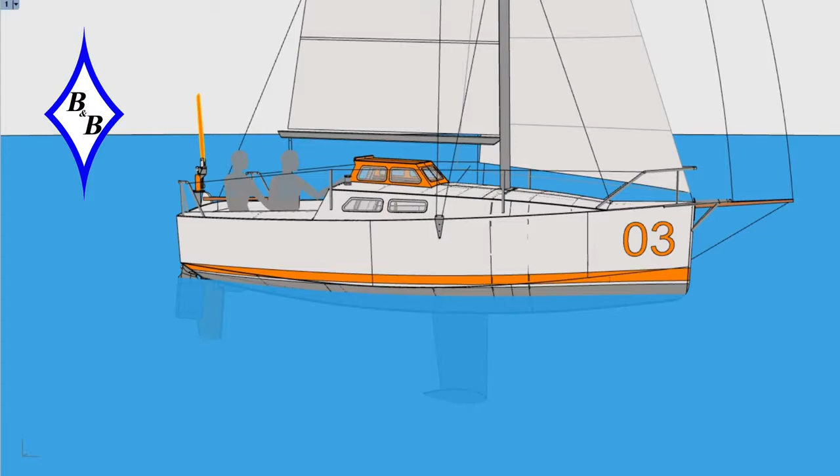Hey guys, this is Alan Stewart with B&B Yacht Designs, and today I am going to be doing a virtual tour of the new ClassGlobe 5.80 kit. I think we're all done with the files at this point, or at least to the point where we're ready to probably cut one of these out.

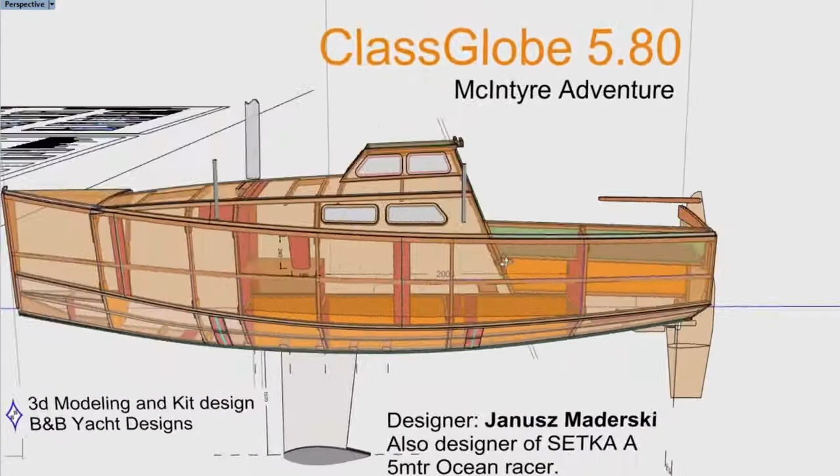So I just want to say thanks to Don McIntyre for letting us work on this project with him. It's been a lot of fun so far. When we first saw this design come out, we shot an email off to him and it kind of snowballed from there. Sailboats are really our passion, and we're fortunate to have been working on this project. I think it came out really nice, and we're looking forward to seeing some of these kits go together.

So I'll get straight into it. I've got a lot to cover, and I'm going to try to focus on the details of the kit specifically, and then the assembly, and we'll just see where it goes. I'll probably put some links to various sections of the video for people who want to skip through. But yeah, let's get into it.

Alright, first I think I'll talk about some of the unique modifications, or not modifications so much as additions that we've made in the process of 3D modeling the boat that I think are going to be instrumental in the success of the kit.

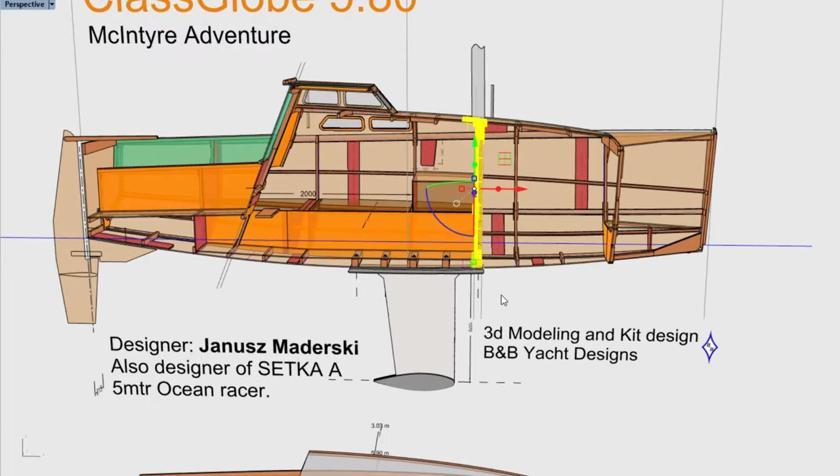Some early design decisions for the kit, one of which was to go with the watertight bulkhead. If you're familiar with the plans, or if you're not, this central bulkhead here that supports the mast is frame D1, and that is a solid bulkhead. In the kit it'll be a solid plywood bulkhead with a butt block down the middle, obviously because it's too big to fit in a sheet. Builders can choose to cut a hatch here, install a custom or an off-the-shelf hatch, or if you're not doing an around the world race, you can put a regular hatch in there.

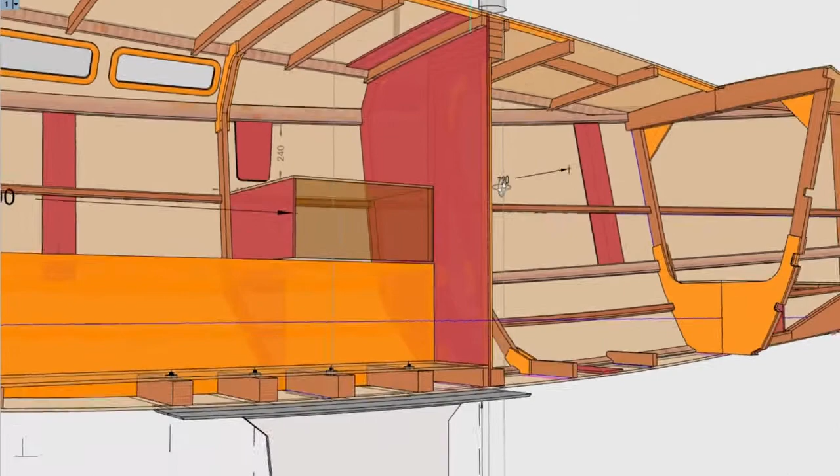Also, because we've put a solid ply bulkhead on the aft side of frame D1, the outer dimensions for this frame are to the aft side, and so the size of this frame is different to what's shown on the plans. It's slightly larger. So if you're building from plans and you'd like to build this frame as a solid bulkhead as shown here, then we'll give you a sheet that has the different dimensions for the aft side of D1.

The other bulkhead back here, which is frame A, is also going to be cut solid in the kit. The plans show a hatch here at the bottom of the bunk, but in the racing version, this would be a solid watertight bulkhead, and if it did have a hatch, it would be a sealable, off-the-shelf hatch, or a panel that was glued in place.

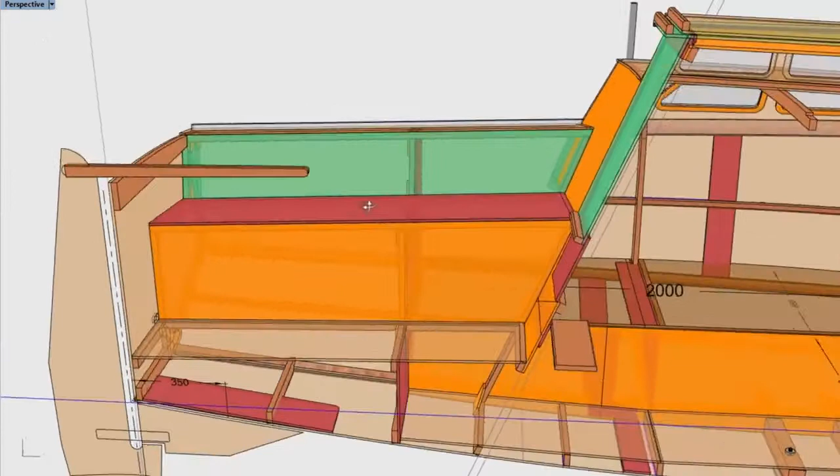In the cockpit, we have no hatch built in here. B&B has a nice watertight hatch design that I have not modeled, but we can provide plans for that separately if somebody wanted to build their own hatch. Of course, you could put an off-the-shelf hatch in the top of the seat top here.

Moving forward, in the kit, we've included the side of the bunk. That will come into play later when I show you the assembly of the kit. We've also included the bunk top panels and the galley box here. So as per Don's request, at least this is how he's going to do it on his boat, instead of a 2.2 meter bunk, we have a 2 meter bunk.

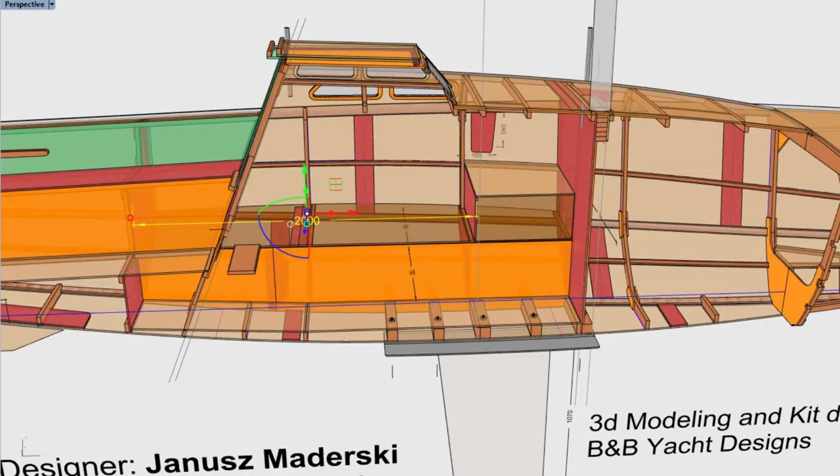And bear with me while I turn on some people. So here's a guy sleeping in a 2 meter bunk, and it's a generous bunk space. And that gives you the galley box here. You can have your athwartship sleeping arrangement with a lift out sole panel. You can do whatever you want to do with the galley here. This box is port and starboard in the kit.

We've included every piece of plywood with the exception of some of the companionway parts. So here we have the sliding hatch as designed by Janusz. Those parts are not in the kit, but there is enough plywood left over to fabricate those parts. For the around the world version, I suspect that you wouldn't have this particular hatch design, and so with the observation dome, you might choose to leave out this panel, which is the floor of the sort of turtle or garage for the sliding hatch.

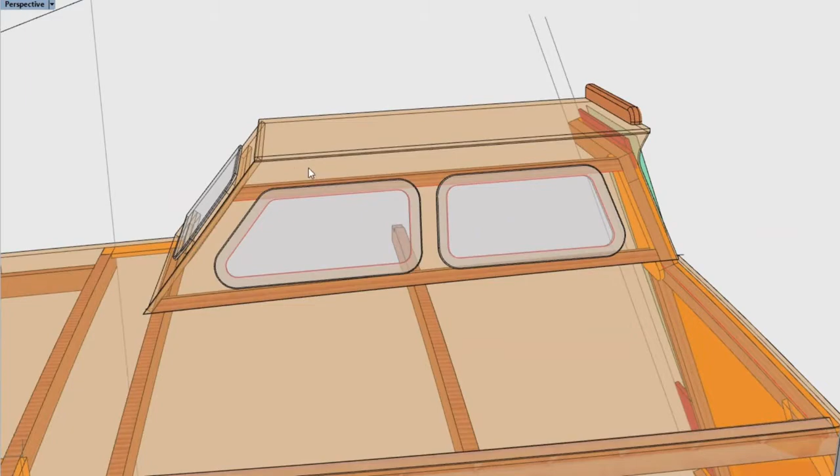And instead, you would just install a weather-tight hatch or whatever hatch you want in the slanted frame here. In the kit, the slanted frame is going to be manufactured as a solid bulkhead, so you can cut whatever size hatch you want into that slanted frame.

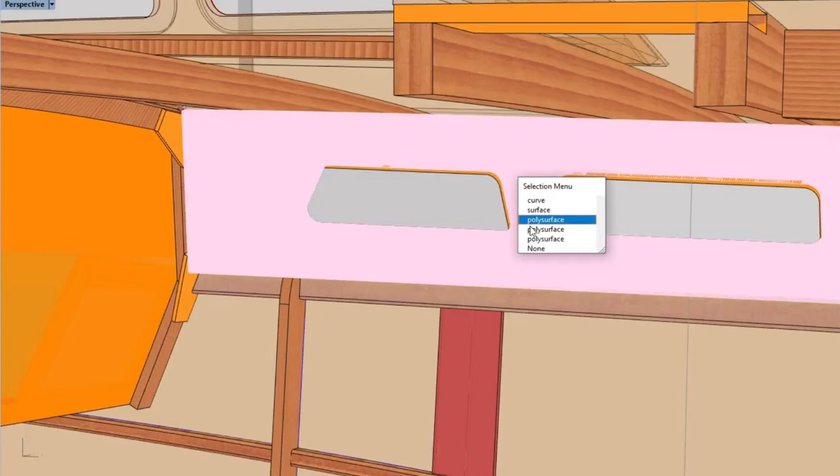We have done a set of port lights in the side of the shear strake to the size shown in the plans, as well as in the observation dome side and forward port. These would be polycarbonate, and in the kit we've got 9mm inside trim ring doublers to give you extra meat to fasten the polycarbonate to from the outside. So the polycarbonate is 20mm wider than the actual cutout for fasteners.

We haven't made any cutouts in the deck panel. The cabin top panel, there's two hatches shown, a vent hatch and an egress hatch in the forward part of the hull there. Those are solid. This panel is a solid piece in the kit, except it's split down just behind bulkhead D1 with a butt block.

Frame E, we've added a bulkhead up to the crash box height on frame E. I believe this bulkhead was shown in the plans, but we've also included this crash box top in the kit. You're seeing it in half section here, but you get the full piece, obviously.

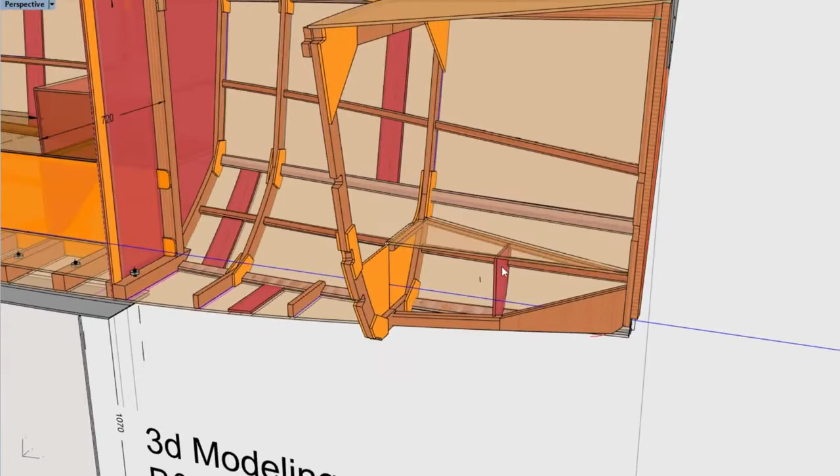And so this was the crash box, and we've also taken the stem knee, as drawn in the plans, and we've extended it. If I can grab it here, we've extended it back to frame E and notched the bottom beam of frame E so that the knee actually dados into that frame, which helps to locate the stem. The stem is in two pieces. There's an inner stem and then a stem cap, and those are CNC cut, and I'll get into the details of those in a little bit.

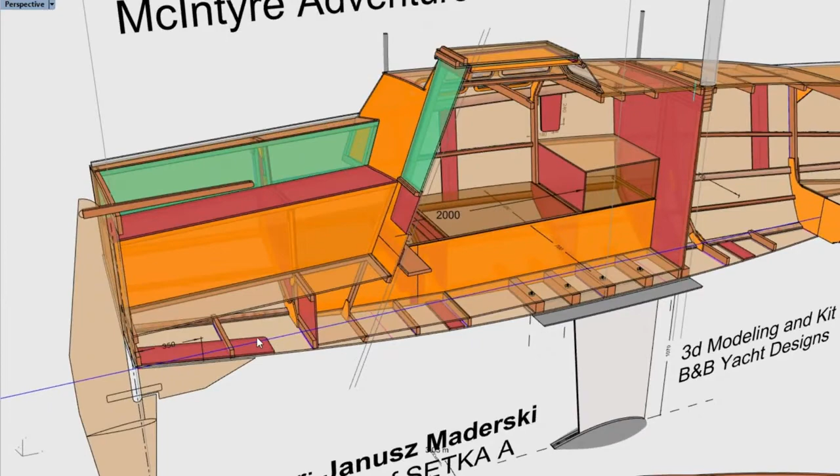So what else? We've designed in all the butt blocks for the side, chine, and bottom planking, as well as the doubler for the skeg and the chain plate reinforcement. We've really tried to think of everything that we could. So yeah, I'll go ahead and get into some of the details of the parts.

Alright, this is the part sheet as of today, May 10th. This is all of the parts that are CNC cut in the kit. So what you're seeing here, all the black lines are obviously 9mm plywood. All of these parts come out of 25 sheets of 9mm marine plywood. So there's the sheets, and the brown parts obviously are solid timber. Those are also CNC cut.

And the blue dashed lines here are pen lines. So these are drawn by a ballpoint pen using the CNC machine, and we use that for all the part numbering and also for drawing on reference lines, which I'll get to in a little bit.

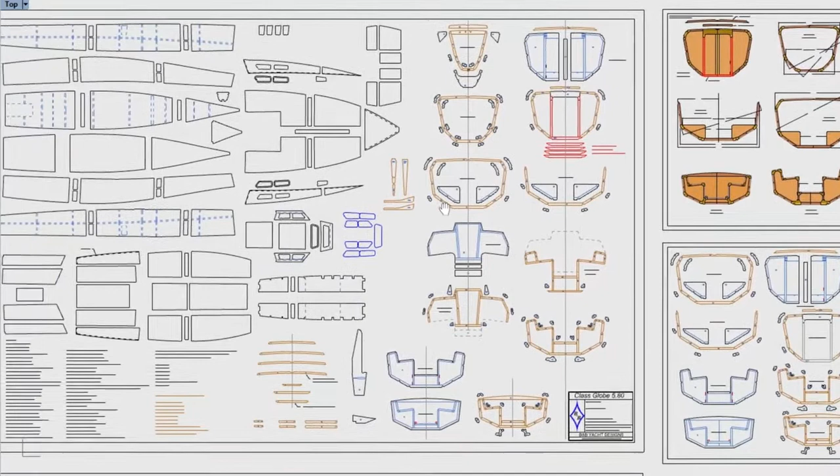On the frames, this kit is unique in that it has a lot of solid timber framing, because it's not a stitch and glue boat. It's frame and plank construction. So on the inside of all the frames, we have solid timber framing. So just in this example, here we have frame E. And so here are the timber parts for frame E. So this is to the plan. We have a top beam, side pieces, chine pieces, and then we have various gussets that connect over the joints.

Frame E also has a second beam on the aft side. Here's that frame that's on the back side of frame E. There's the dado for the stem knee. And you can see all these pieces are numbered with a frame letter and then a number, and usually they're going in a circular pattern. So I have E1, E2, E3, E4.

And because all these parts look very similar, we've also added a reference identifier, and that's this little circle here. It's about a 4mm diameter circle. The circle is on any part, especially the small parts, where it's not clear which way they might go. So for example, this gusset E9, the dot indicates the topmost corner or the innermost corner.

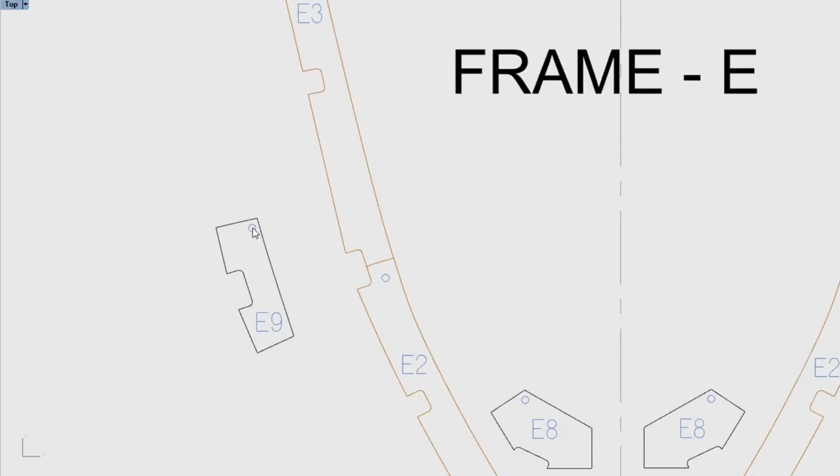So in this case, if you're just looking at this part, you would see the dot, and basically if you pinched the part at the dot with your fingers and let the part fall by gravity, that's kind of the orientation that the part would take in the frame. So that will hopefully help to position these parts properly, because this part is almost but not quite a mirror image fore and aft. And that brings up another point.

In the kit, many of the parts are port and starboard. For example, we have 2 E9s. And it would be really easy to just take this part and copy it and cut out 2 of them. The problem with that is that when you put this part in the correct spot over here, if you have the pen line facing the user, then the part's upside down.

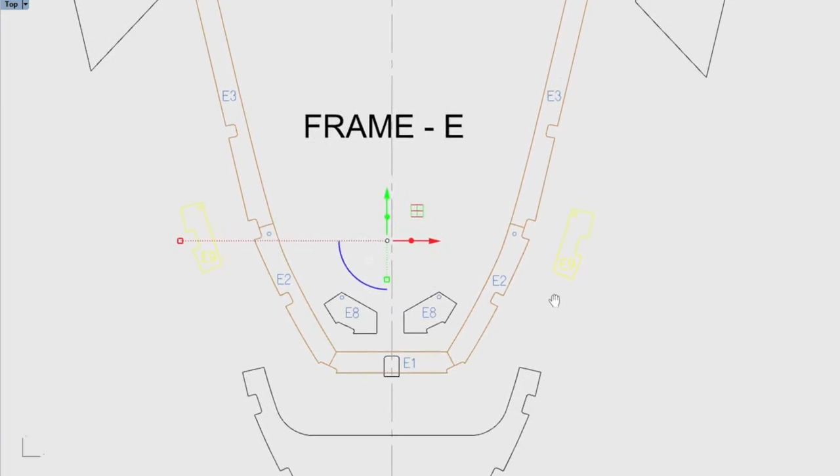So we take the extra step to actually include a port and a starboard proper part. So you will get a port and a starboard part, and so when you assemble the frame, all of the indicator marks will be facing the user in pretty much every case.

In order to keep from losing all these gussets, we've combined the gussets for each frame into clusters. So here is a gusset cluster for frame A, and here's the other one. So these parts here contain 3 gussets connected with small plywood bridges, and this one has 4 gussets with bridges. And this is just helpful when CNC cutting, that we don't have these tiny pieces flying all over the place. So these would just be broken apart, and then a quick sand to clean up these bridges.

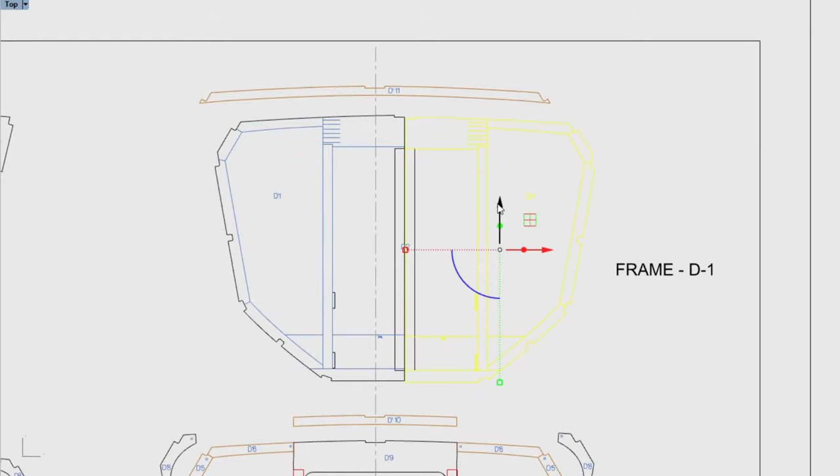Here is frame D1. This is the mast support frame, and this is a good example of one of the frames that is a solid plywood frame, and you can see all the blue lines are reference lines. So when you assemble this frame, you'll put the butt block across the joint on the forward side of the frame, and you've got these lines referencing where all the cleats go, all the framing. So here's all the framing for frame D1, and you can see it's similar. It's ringed with these timber pieces that are all numbered with the dots and the lettering.

We have frame D and also frame D1, and so with the part numbering, frame D is numbered with a D, and frame D1 is numbered with a D prime. That's the way we decided to do it.

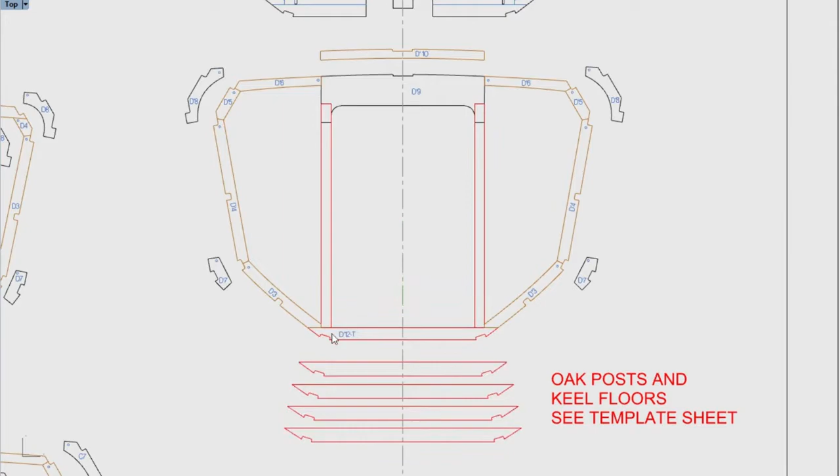So these red parts, these parts are the keel floors and the posts for the mast, and these are too thick to be CNC cut. So what we've decided to do is include templates for these keel floors here, and these are just dimensional stock. So this is something that could be supplied in a full timber kit, or these oak pieces could be sourced locally by the builder and cut. And I'll show you really quickly the template for that.

So here's a template for the keel floors. The keel floors have obviously a forward and aft edge. So here we have the 5 keel floor timbers. The black line is the forward edge of the true cutout for that chine log, and the red line is the aft edge. So what we've done for the templates is we've taken the absolute outer perimeter of those 2 lines and provided that as a template.

So you could cut all these parts out on a bandsaw, and when you fit them into the jig, you could do your final beveling and not worry about cutting away too much material. So this is a 1-to-1 template of the half size of the keel floors.

The other frames follow the same logic. Here we have frame C. We've added in the kit these partial bulkheads for frame C where they go underneath the bunk tops.

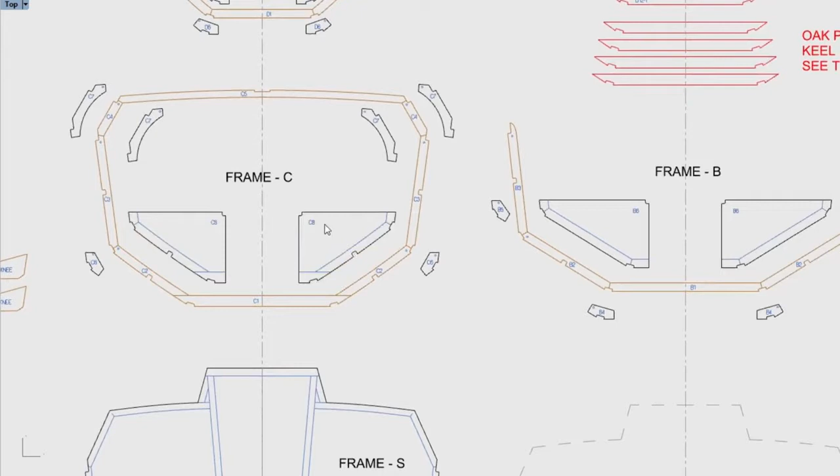Frame S, we named S for slant. It's the slanted frame, which is the companionway frame. And here you can see the bulkhead part of the frame, the plywood part, is in 2 pieces because it's too large, so there's a butt block here at the bottom. And there's a forward and aft side. Frame S is one of the more complicated frames. Here we have the forward side and all the pieces associated with the forward side and the aft side.

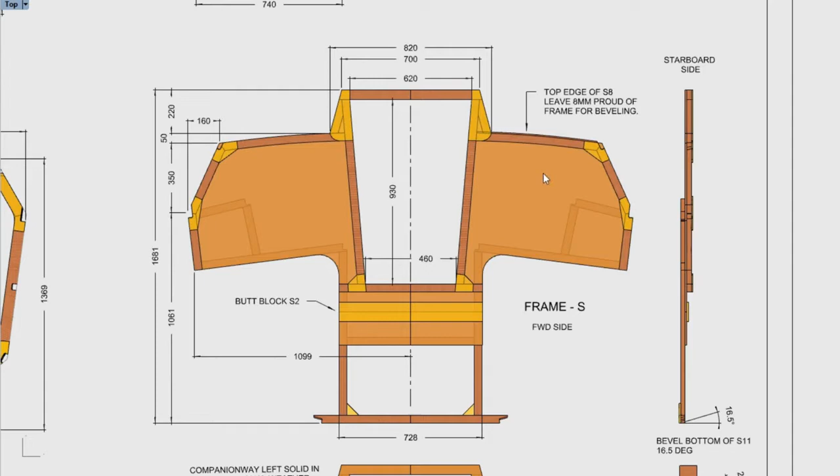And for assembly of the frames, we have a sheet showing how the parts go onto the plywood. Frame S is also unique in that it's at such an angle to the other parts. So a few of the details there. The top beam here, which is S8, is left proud of the plywood bulkhead, and then it's beveled to receive the foredeck. We've also given the bevel for the bottom of frame S, and that's where it intersects with the bottom planking.

And also on the aft side of frame S, here we have the framing that supports the side deck, the seat top, and the cockpit sole, and those can also be beveled prior to assembly of the frame itself.

The dimensions of all these match the plans in almost every case. Giannis really did a very nice job with the plans, and we found all the dimensions to be very accurate. And so you'll find these dimensions match with the plans, which they should do because it's the same boat.

And here's another example of a frame. You know, we try to think of what information will you need to assemble this frame. And helpful information is like diagonals here for checking the squareness of the frame and the overall dimensions, of course.

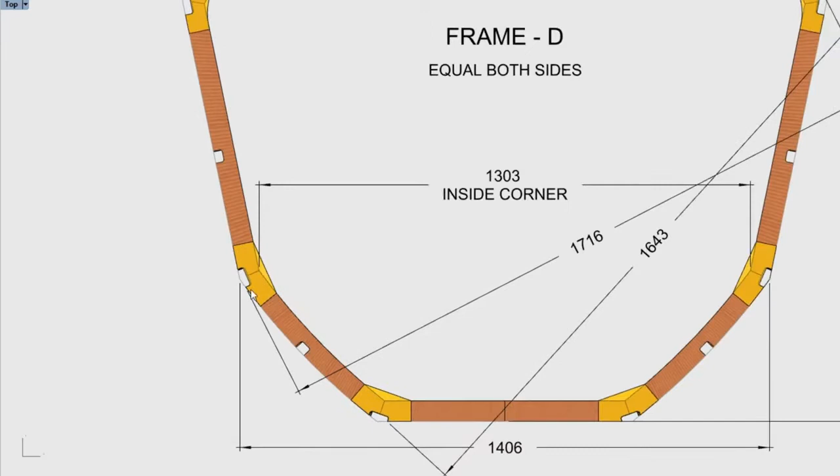But because the parts are all pre-notched to the minimum notch for the various stringers, we can't measure straight to the corner very easily. So we've made an effort to try to mark where we're actually measuring to. So you can hook your tape measure, for example, on this corner and send it across to this space and check your diagonal in that way.

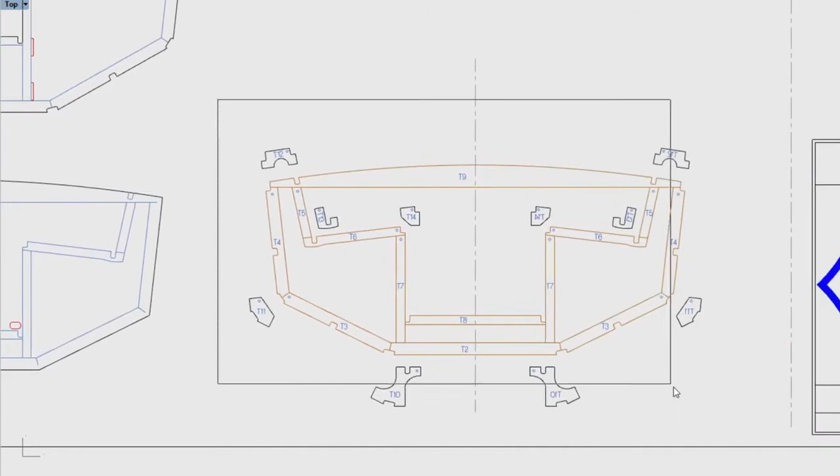The transom frame and also frame A are both solid plywood frames. Here they are, here and here, and they both have a fair amount of framing. The transom frame could be assembled using the transom as the template. So here's the pen lines all drawn on the transom. So you could lay all your transom framing onto the transom and glue down all your gussets, and you could install that in the jig without the actual transom panel.

And that's nice because you can then let your battens and your side stringers run past the transom, trim them off later, and then glue the transom panel on. There aren't any dimensions given for the transom because they're all drawn. All the parts locations are drawn on the transom. There is another sheet in the kit plans that shows all these parts in a larger scale because it's difficult to read all the numbers here for the bulkheads.

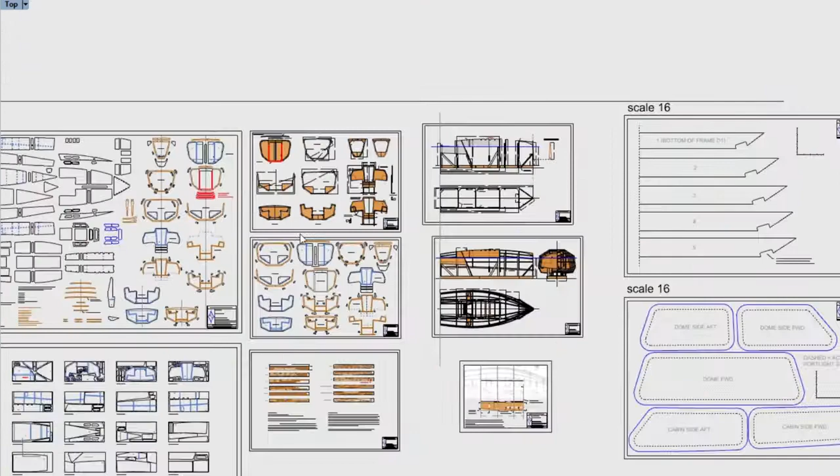In addition to all of the frames, we have CNC cut parts for the stem cap, and also the knee gusset. The knee is in 2 layers, so it's laminated together. And we've also provided a sheet that gives that knee shape as well as the inner stem in full size, so that if you are building from plans and you can get your hands on this sheet, you could cut these parts out and fit them in, because that will help you to locate frame E and also the stem. And that also leads me over to this jig drawing.

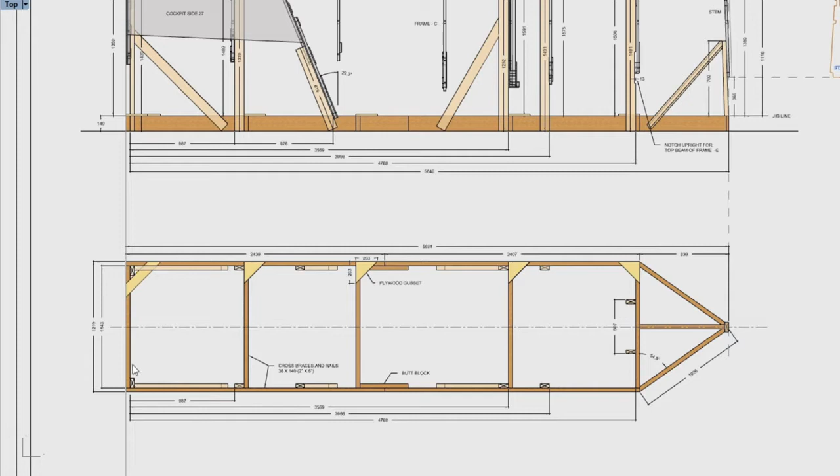So we've designed a strong back with dimensions for building the jig on. In the US, this is 2x6 dimensional lumber, which is 38 millimeters by 140 millimeters. The actual size of the jig itself does not really matter. It could be any material really. We've tried to dimension it so that we're referencing the inside of the framing. So you could build this out of any material. And we have these upright posts here, which in the US we would use 2x4s, but whatever is available anywhere. And it really doesn't matter.

But this sheet shows all the frames in their location on the jig, with the height of the frame above the jig line, and also the location of the frame relative to the transom, which is as they were dimensioned in the plans.

The stem, we've given a height for the top of the CNC cut stem and the knee, and you can see here where the stem knee is dadoed into the bottom of frame E. And so we've got an offset for the stem, which gives you the stem rake, and the stem is fastened onto the forward side of a little upright here, and the height of the stem is provided there.

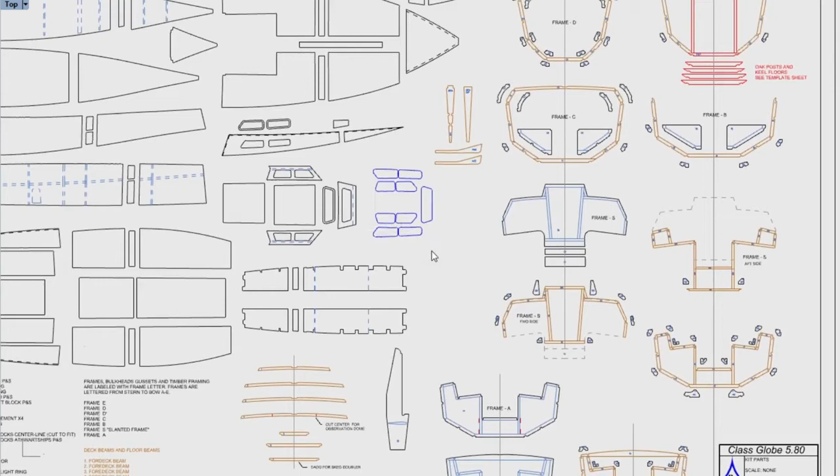We also have CNC cut deck beams. There are 4 deck beams, 3 additional bottom floors, and also some fore and aft beams included, as well as these plywood templates for the skeg and rudder, which we were able to fit in the sheets as well. These are the polycarbonate shapes for the port lights, and those are also provided at 1:1 scale if you want to cut out your own port lights.

And if you want to do something different for the ports, then you should just contact your kit manufacturer and say, please cut me out a sheer strake panel that does not have any cutouts in it. And I'm sure they'd be happy to do that, and you could put in your own ports if you wanted to do larger or smaller or whatever. I think that just about covers the kit parts.

So here are the solid timber parts nested in the boards. And so we CNC cut these parts directly into boards. These boards are 8 inches by 96 inches, or 2440 by 203. And all these parts are finished thickness of 22 millimeters.

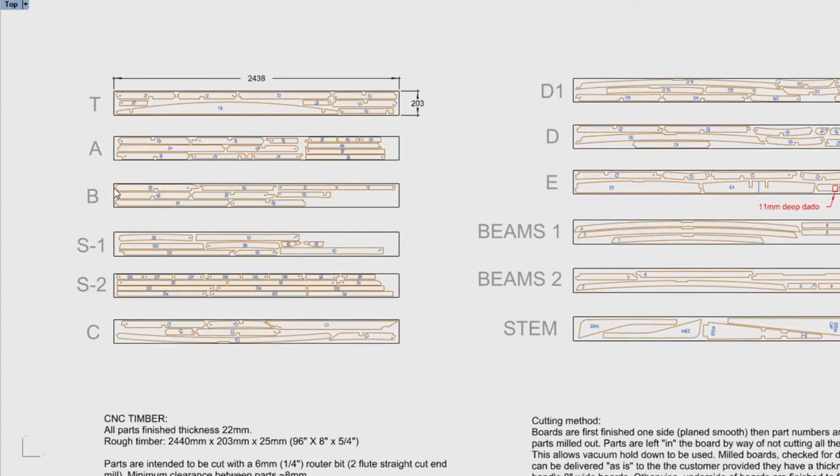So the way we typically do that is we surface the top of the board, we draw our location information with a pen on the parts, and then we mill out these shapes in the board, but we don't cut all the way through. So we leave a skin on the bottom of the board, which you can then plane off through the thickness planer, and all these parts just fall onto the floor. It's brilliant. Every time I do it, I enjoy it.

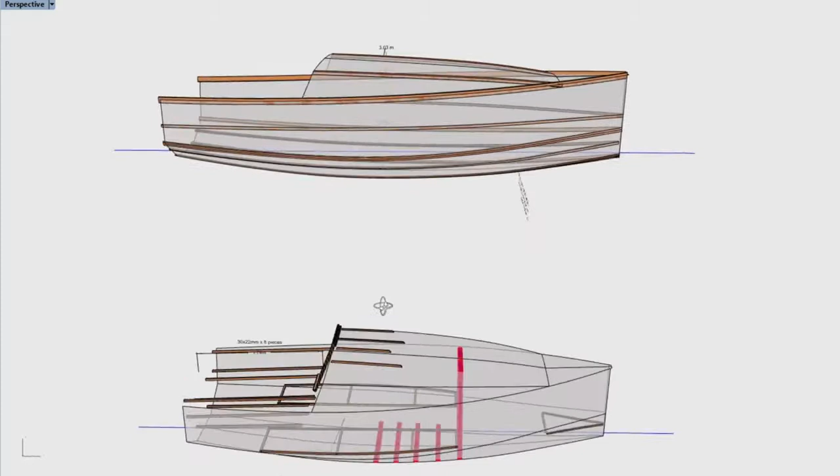So there you can see all the solid timber parts, with the exception of the mast supports, posts, and the keel floors, which brings me over to this model here. These 2 models are all the parts that are not included in the CNC cut kit, but could be included in a full timber kit depending on your kit supplier.

So this top one shows all of the hull stringer material, as well as the length of each of these, which will be helpful also for someone building from plans. These are the exact lengths of the parts, so you'd want to add a little bit for sizing these. So those are the chine battens, or chine logs, or whatever you want to call these particular pieces, the chine pieces. And these are the panel stiffeners, the stringers for the chine planking and the side planking.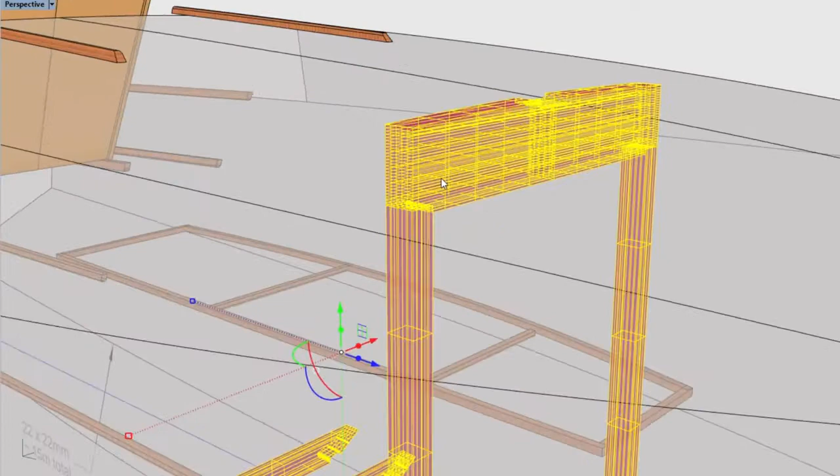And here we have this other model. These purple parts are not included in the kit sheet that I just showed you. Neither are the keel floors. So these are either sourced by the builder, and these parts here. These are the athwartship parts that are clearly identified in the plans. You got all this grain running across here, and you got your mast sitting right here. So you want these particular pieces of timber to be nice and strong. These could be supplied by the kit manufacturer, or they could be just cut by the builder.

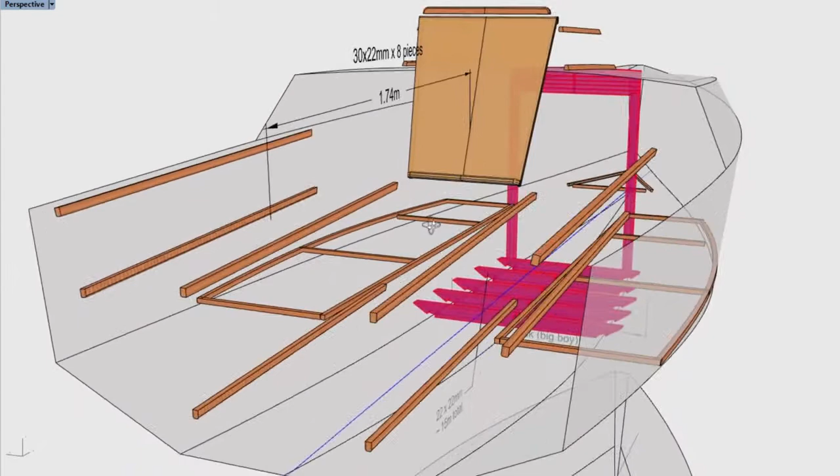These other pieces that you see, these are framing pieces for the bunk top. These are not included in the kit. Again, these pieces could be included in the kit, but they are not CNC cut. So this would be an additional timber package that would accompany the kit, that you would rip all these pieces out. So these are all the cockpit cleats for supporting the sole, the seat tops, the backrest coamings, and the side decks. And those are 8 pieces, and there's the size of those if you're following along at home.

There's also a few pieces of solid timber in the observation dome, which I didn't dimension out, as well as a frame around the top of the crash box. While I'm here in the model, this is a displacement model of the 580, and so you can screenshot this if you're interested in the displacement. We have the displacement at the design waterline, and also at -10 to -80 millimeters of displacement, and you can see it's about 75 kilograms per centimeter of immersion.

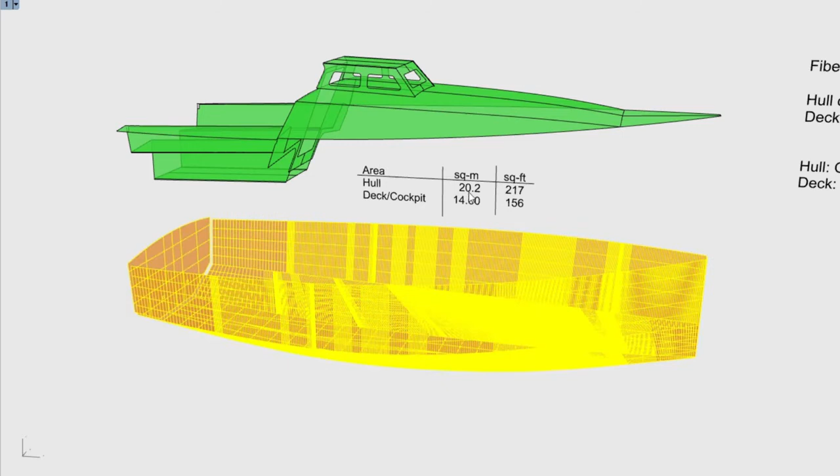Since we just got some clarification on the glassing schedule, I decided to also show some surface areas. So this is the total surface area of all the hull panels, 20.2 square meters, and all of the deck panels, which includes all the cockpit panels, is 14.6 square meters. And in our case, at least for kits in our area in the US, we will probably be cutting all of the plywood components from 9mm Okoume marine plywood, because we don't have access to 10mm without special ordering it.

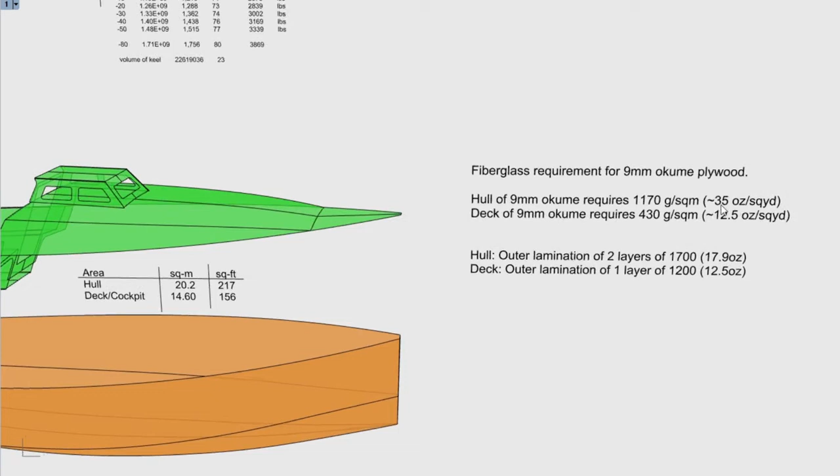So in that case, the outer lamination for the 9mm Okoume hull was given as 1,170 grams per square meter, and for the deck 430 grams per square meter. And so I converted that into ounces per square yard for our US glass purchasing. And so for the hull, the outer lamination would be 2 layers of 1700, which is 17.9 ounce, and for the deck it'd be a single layer of 1200, which is 12.5 ounce, which is very close. And then of course the joints are also taped with fiberglass, and this is just the outer lamination to bring the hull planking up to the required strength.

This is another little addendum sheet that we did, and this is showing the dimensions of the bunk side. So in the kit, this is right here, and I've got my dots turned off. Let me turn the dots back on here. Bear with me 1 second.

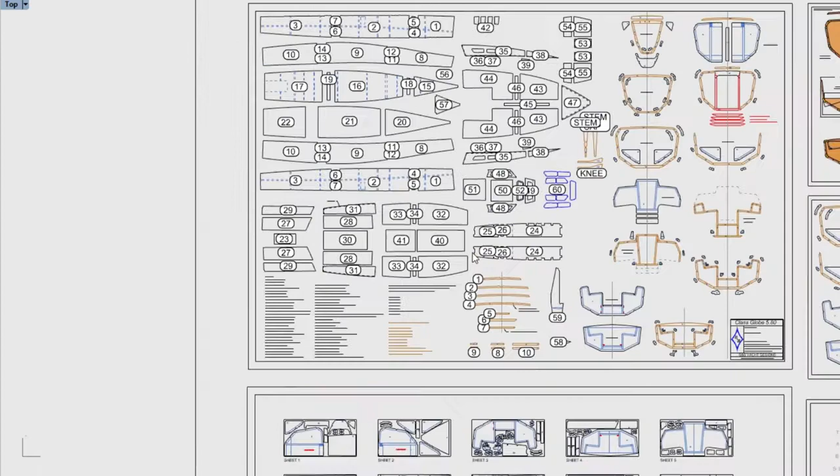They just get big when I zoom out. These are parts 24, 25, and 26 is the butt block, and you can see those are listed as bunk sides fore and aft. And so if you're building from plans, this part is nice to have, and I'll show you why in a second. But this is that part dimensioned out. If you're building from plans, you could cut this part out, and it will help you with the jig assembly,

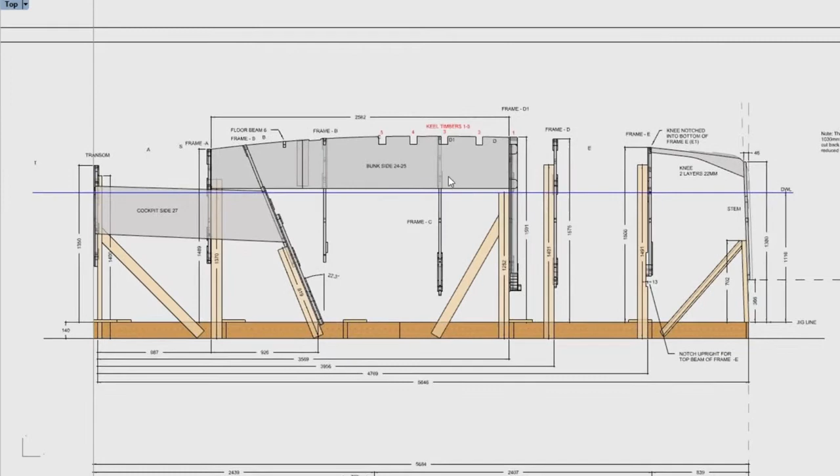because what we actually do is we install this part into frame A and frame D1 as part of the jig assembly. So, all right, here's the frames floating in space, and I'll just give you a quick view of each one, starting at the transom. There's the transom with all its framing. This is frame A, and again, this gives you an idea of all the notching that's been pre-done in these kit parts. So you've got notching already done for all of the support for inside the cockpit.

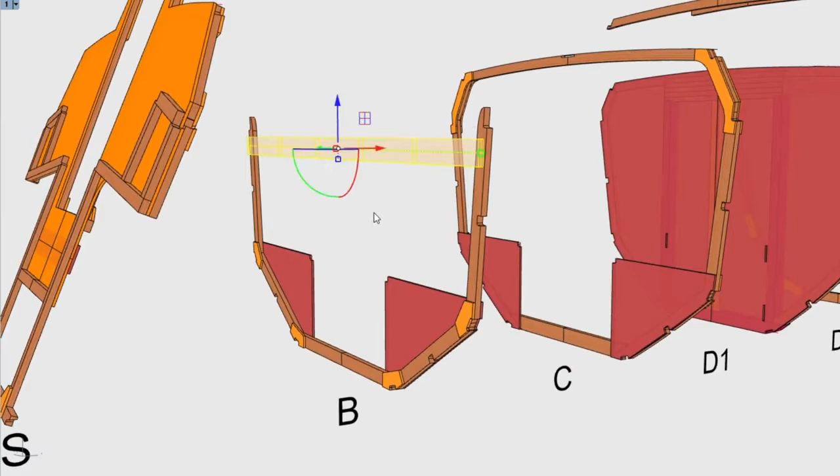Here is the slanted frame, fore and aft. There you can see that butt block on the slanted frame. This red line indicates the amount that this top beam is left proud. It's actually not shown proud there in that particular view, but the part is left extra tall. Frame B is the only frame that doesn't have any across the top support, so this is a temporary 1x4 or something like that, just to help keep that frame from moving around.

Frame C is the next frame in the bunk, in the forward part of the bunk. Frame C is where the galley starts, the galley box. And so there's the fore and aft part of C. Frame C does not have any gussets on the forward side of the lower chine, because there is a floor timber running across the forward side of frame C. Also, I don't want to get anybody confused. So this bottom part of frame C we actually changed because of the way this cutout is.

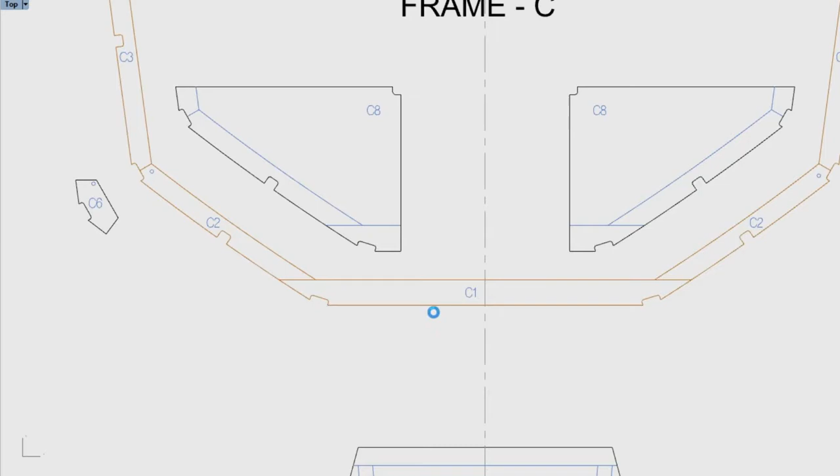Let me jump back over to the kit parts. Frame C. There you can see we actually sent the bottom beam all the way out as opposed to sending C2 down. So basically the notch is on this piece as opposed to on that piece. And the reason for that is just for the integrity of that particular piece. Sorry, it took me a while to get back. It just looked a little bit fragile there, so just to clarify that.

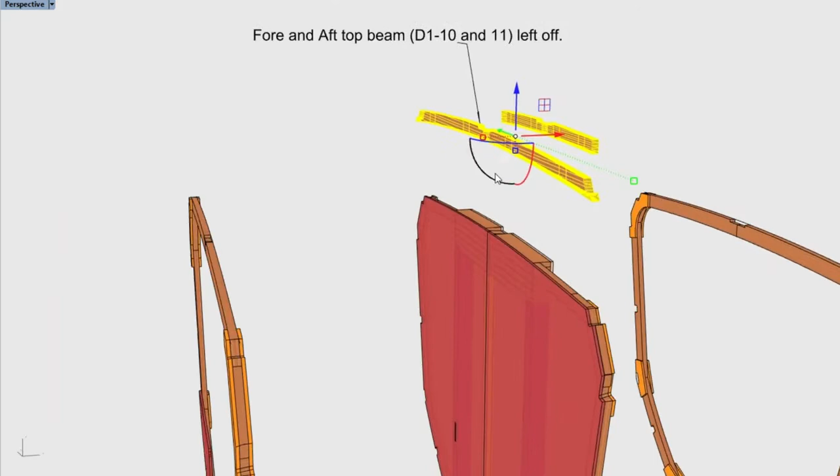So there's frame D1. You can see the purple pieces again. Those would be not CNC cut, in addition to these other pieces behind this plywood cap over the mast support. The aft side of frame D1, of course, is a smooth bulkhead, watertight bulkhead, and we'll get to these notches in a second. When the frame D1 is assembled, we leave off the forward and aft top beams. So this beam here is glued across the aft top edge of frame D1, and this one across the forward edge of the mast support.

But we want to leave this one off for the jig assembly so that it doesn't interfere with our support for supporting the bulkhead. And this one we want to leave off because a lot of it's going to get cut away when we bevel the top of D1 for the foredeck. Here we have frame D. Frame D is a pretty simple one. It's symmetrical fore and aft. And of course frame E with that crash box bulkhead on the aft face and the extra beam across the back side that supports the hardware for the baby stay.

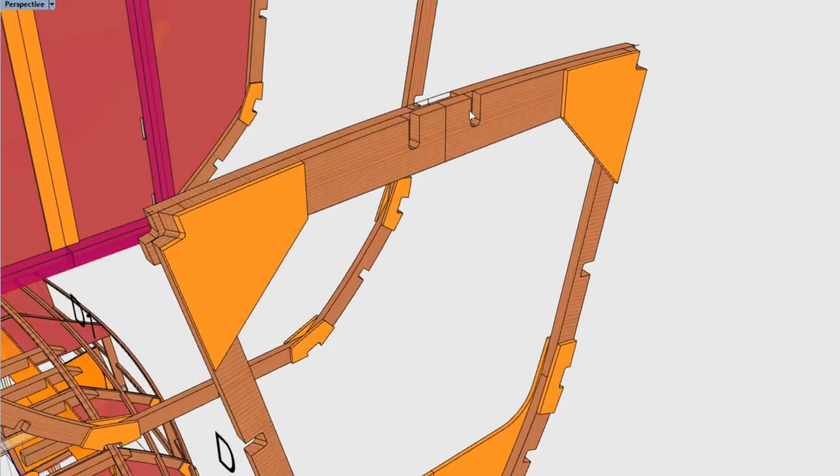And here is another detail. The forward part of the beam on frame E is notched out to receive the king plank beams that support the foredeck and take the compression loads from the forestay. And also these top beams are notched, you'll notice, for a plywood butt block which joins the two halves of the deck. So those are all the frames.

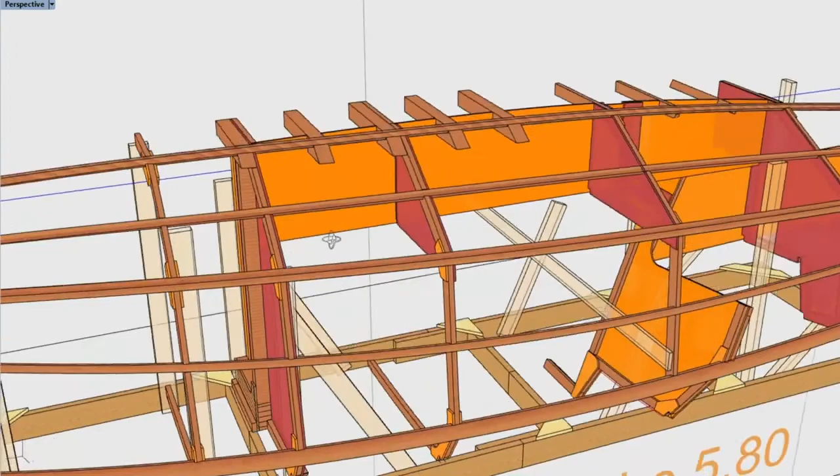In addition to those assembled, you will also assemble the bunk side piece, which is the two pieces fore and aft of the bunk side, as well as one of the cleats, the cleat that runs fore and aft, this one right here, and that would just stiffen up that panel. So this would be a little bit of a sub-assembly, and this leads us into the jig.

Here we have the jig. I'll actually jump over to this one instead. So here we have the jig. So here's the strongback. These obviously are our temporary support pieces. And here you can kind of see what we've come up with. This is kind of the reveal.

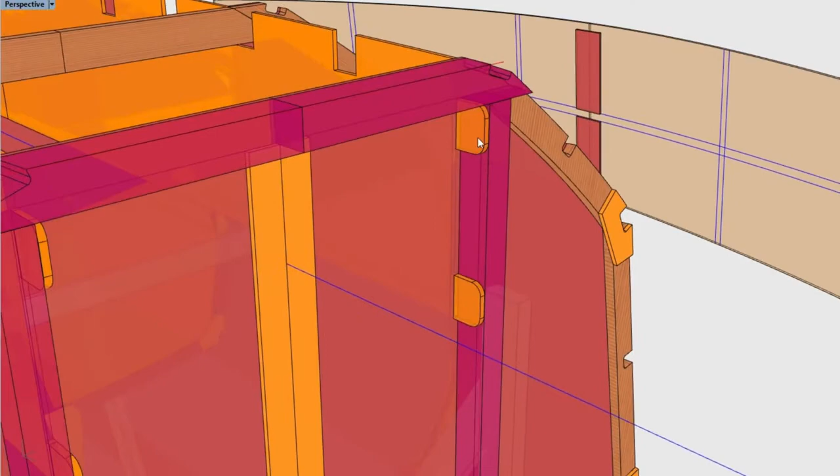These two frames, B and C, actually hang by the bunk top sides, and so they don't require any other support than that. You can see the bunk sides are pre-notched for all the keel floor timbers, which locates those fore and aft. And the bunk sides have these tabs, and now you can see the purpose of those notches in D1. The tabs slide through those notches, and then the bunk side can be secured to the mast support

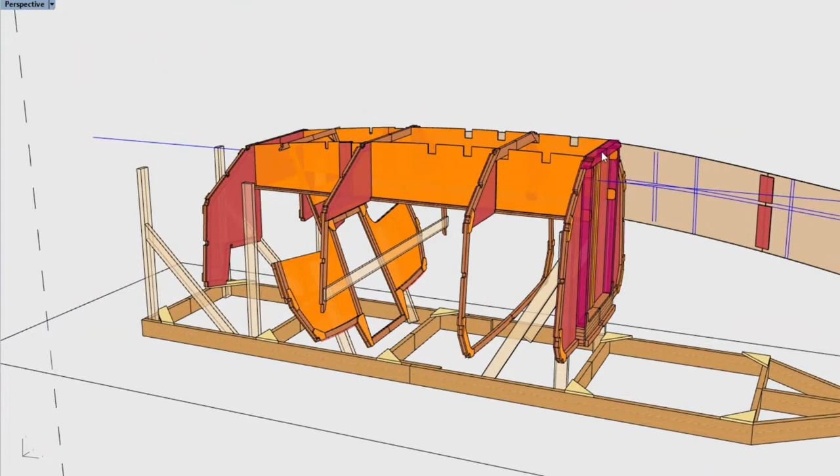post. And in the back, we have similar tabs going through frame A, and they can be fastened to the side of that vertical framing. The slanted frame is also notched out, and so the slanted frame drops right into the bunk sides. And of course, these two frames drop down into those notches as well, so that locates those frames. So really the only thing you're having to do is establish the vertical height of frame D1 and frame A, and all these other pieces should fall into place.

There's a dimension provided for the location of the slant frame at the bottom, and it's clear of the floor by a little bit. The side panel also comes into play here, because the side panel in the kit, although it's made up of 3 pieces with butt blocks, these blue lines you can see are going to be CNC drawn on the inside of the side panel, and they all have the frame locations indicated on them.

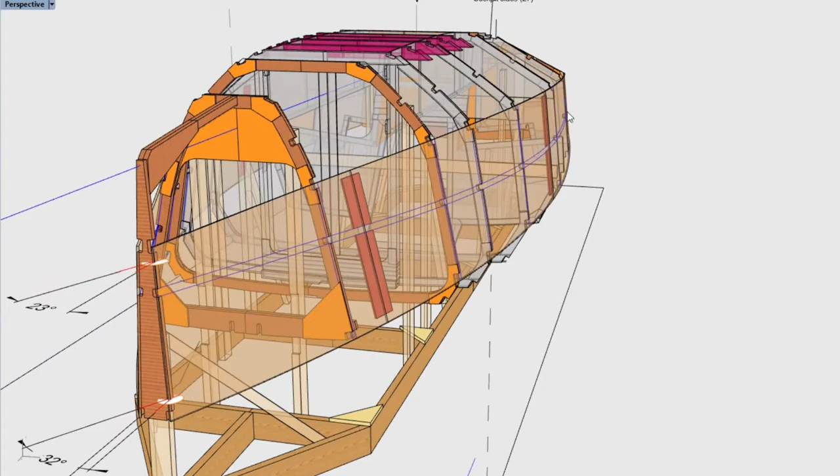So if I go up to the next step here, you can see I've got the side panels bent around the jig, and this is helpful as a double check, but also for alignment of all these frames, both vertically and fore and aft, because once you assemble this side plank, you can't really get these frames out of alignment as long as they are lined up on these lines. And the side panel stringer runs through the middle of the side panel; these notches on the frames locate each frame vertically, and the side lines locate it fore and aft.

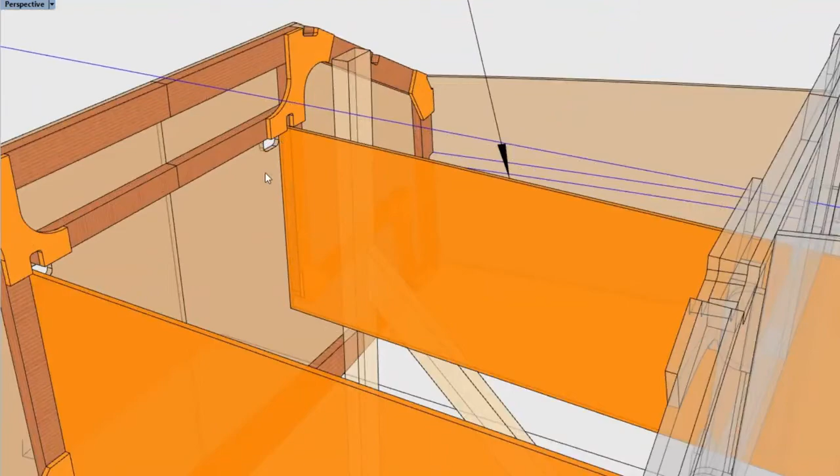So in this render here, the assembly from the previous step is grayed out, and in order to establish the location of the transom, there are a number of options, but the easiest one is to actually use the cockpit sides from the kit. The cockpit sides will butt right up to the aft face of frame S, and right up to the inside face of the transom, and that locates the transom exactly.

The other way to do it, of course, is with the side panel. You can temporarily hold the side panel up to the framing, and the side panel is cut exactly to size. We left it 1 millimeter long in case you're using 10 millimeter plywood for the kit, but I think everyone's going to be using 9 millimeter. So that establishes the fore and aft and vertical location of the transom.

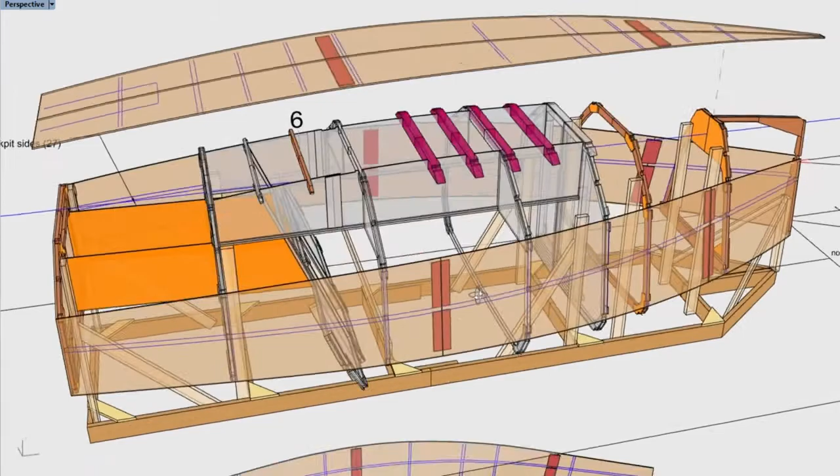It also establishes the location of frame D as well as frame E, which you can also get from the plans, but it's always good to do a double check, especially with any pre-cut parts in the kit. This is something that we stress with all of our kits, because all the parts are basically perfectly cut to size. You want to take advantage of any part that you can do a dry fit on, to use that part as an alignment tool for the parts that will go on further down the process.

Another detail here on frame E: due to the extra beam across the aft edge, we've notched out the vertical support for frame E so that the frame is plumb in the jig. On the stem, here are the stem bevels, slightly different top and bottom for the side panel itself. So the stem could be pre-beveled to these angles.

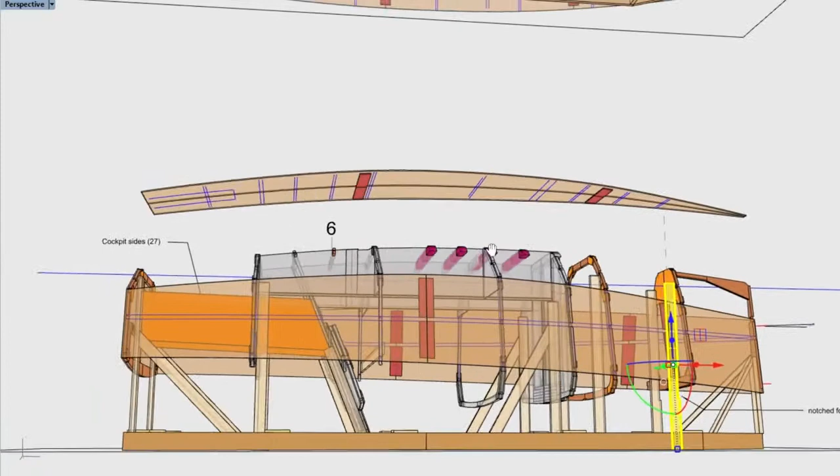Similar to the side panel, the first layer of bottom planking has all the pen lines drawn on it for the location of both the frames as well as any additional floor timbers. So for example, here is a floor timber that is installed across the bunk tops, so it would need to be installed prior to the bottom being glued down if you were permanently installing the bunk sides.

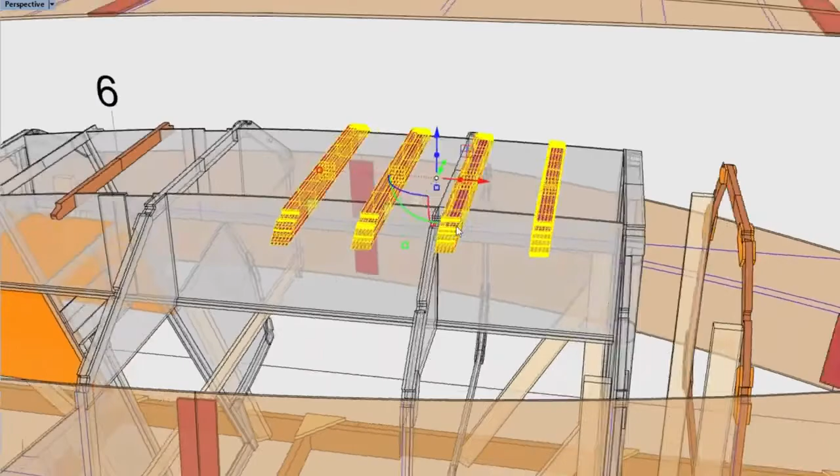That brings me to another note. These bunk sides do not have to be installed permanently in this way. You could, in fact, assemble the bunk sides dry with these butt blocks and use them just like we've used them here, but only as an alignment tool, because you can actually remove the bunk sides after the boat is flipped upright. And you would do that if, for example, you wanted to cut out the floor timbers and install the floor timbers later on in the process, rather than in situ here as shown.

before the bottom planking was glued on. And it may turn out that that's an easier way to install these keel floor timbers, but I think it's possible that they could be installed into the jig pre-notched like we've shown here. But again, if that for some reason ends up not working out for people, then you would simply remove the bunk side panel after the boat was planked, install your keel timbers, and then reinstall the bunk side panels.

So the bottom plank can also be used as an alignment tool, of course, to locate the frames and just more fore and aft position references, basically. I think that just about covers everything in this drawing.

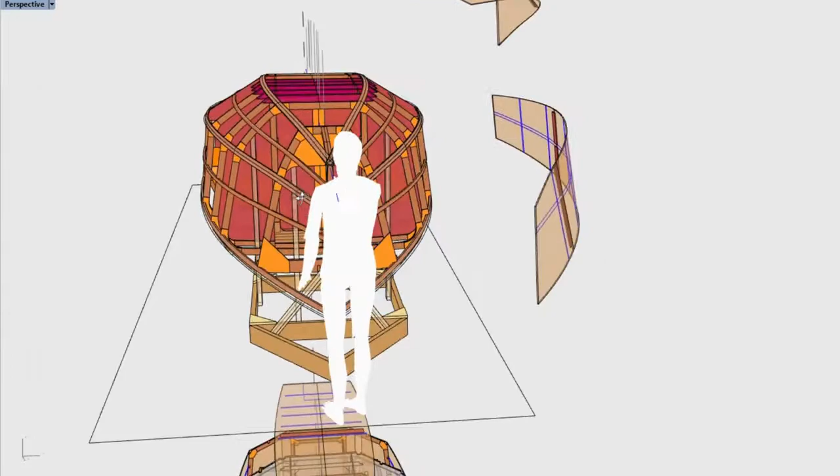So in the next one up, you can see we've installed all of our battens. So the frames, while they are all pre-notched for the battens, they still require a fair amount of beveling. And so just to give you an example of one of the more extreme cases, up here on frame E, all the parts are cut out to the aft edge of the frame. So you can see, looking down this edge of frame E, the amount of beveling that's going to be needed on frame E.

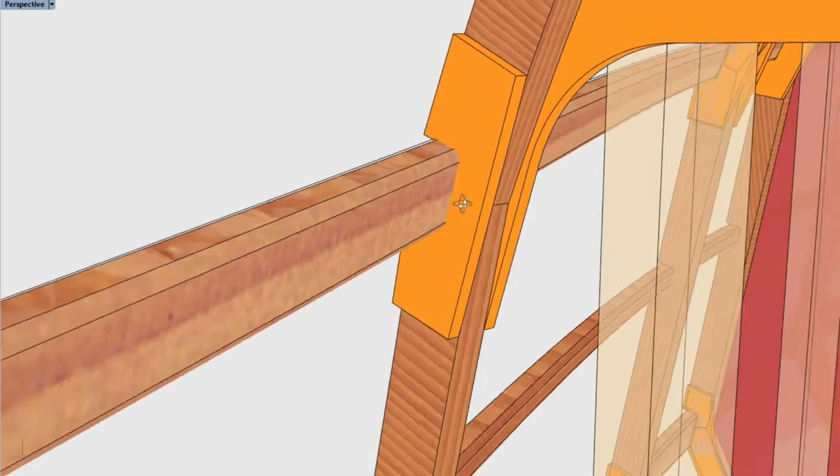And also, while the aft part of the notch is CNC cut, the forward part of the notch is going to have to be let in further by the builder, either with a die grinder tool or a chisel. And frame E is the most extreme example, of course, because it has the most taper to the bow, but frame D will also require beveling. Again, you can see here the forward edge of frame D is outside the line of the planking, and the aft edge is at the 0 line. Frame B, on the other hand, is almost amidships, and so requires almost no beveling.

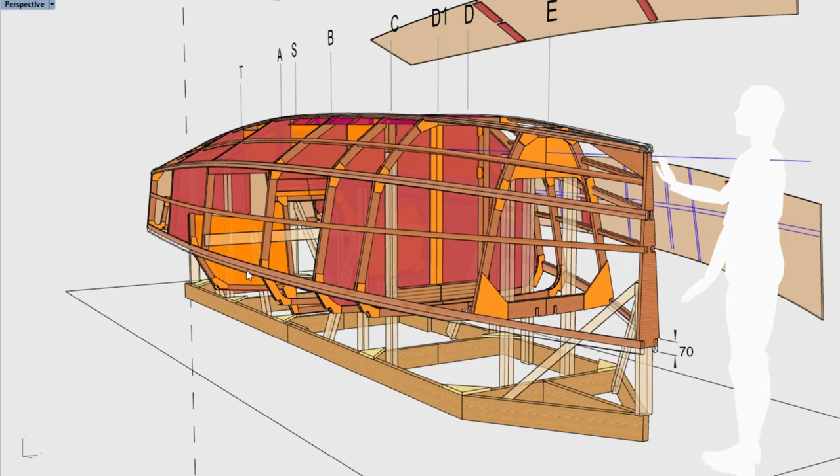The sheer clamp stringer in the plans is 22 millimeters by 70 millimeters, and it's shown here. The gray part here is a full 70 millimeter tall piece running fore to aft, but it's only needed the full height in the area of the cabin. So this could be installed as a full 70 millimeter tall stringer and then cut down along the side deck portion and the foredeck portion. But I think it could also be installed as a 40 millimeter by 22 millimeter piece, and then an additional piece glued to the top of it, which eventually supports the sheer strake panel.

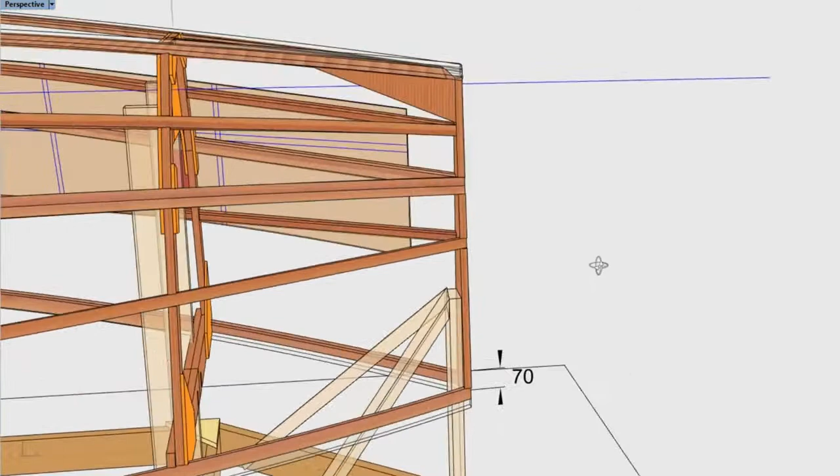Up at the forefoot here, you can see these two chine battens coming together alongside the knee, and so this is just a little bit of detail of how those would intersect with the knee. And we've already applied some bow round to the forefoot here, built into the inner stem, and for that reason the height of the stem does not match the height of the stem in the plans, but that's only because we've already removed some material from the bottom of the stem.

The stem is pre-notched for the battens here and here. It's not notched for these two chine stringers because it would just waste away the stem here. So I think it is okay to butt these into the backside of the stem, but if not, these could be partially let into the stem, or the inside faces of these stringers could be tapered down so that not as much notching is required of the stem, so that we don't weaken the stem right across here. But in the kit, this area is not notched, although these intersections are drawn on the stem with pen. I think that about covers this drawing here.

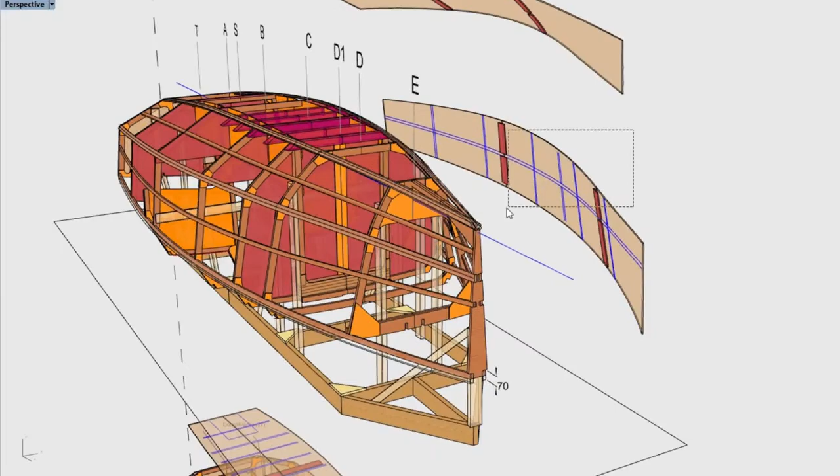So again, the side and bottom panels can be thought of almost like templates at this stage, because they can be dry fit onto the side of the hull to double check the location and alignment of all the framing on the jig, and then they can be taken off the boat to allow for the installation of all the battens and all the beveling. Again, all these battens are just as per the plans. So the chine batten here, for example, is installed, and then it's beveled half and half exactly down the midline for the side panel.

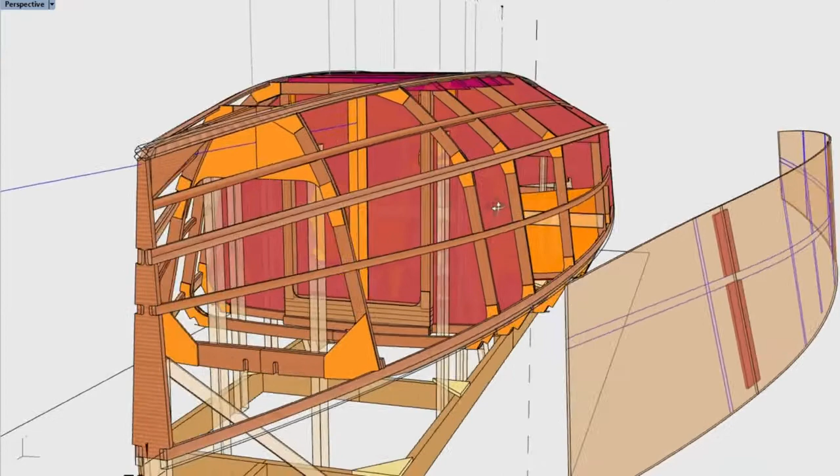Just to reiterate, the side panel is cut exactly to shape. So the forward edge of the side panel will line up exactly with the forward edge of the inner stem, and the aft edge exactly with the aft edge of the transom.

The planking schedule as designed here would be side panel, then chine panel, then bottom panel. And the chine panel, this is what we're calling the chine plank here. It's also in 3 pieces with butt blocks. It would be installed in 3 pieces. So here we have the center portion of the chine panel with the butt blocks, and here I'll go ahead and put the side plank in place.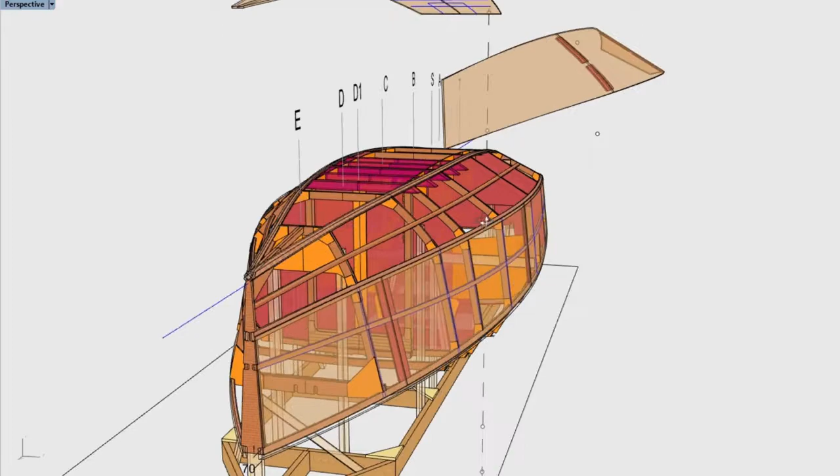So let's imagine we've just glued on the side planking. So there's the side planking in place, and it would require beveling along this edge to receive the chine plank that would overlap it ever so slightly. So here I'm going to install the middle portion of the chine plank next. Okay, so there's the middle portion of the chine plank.

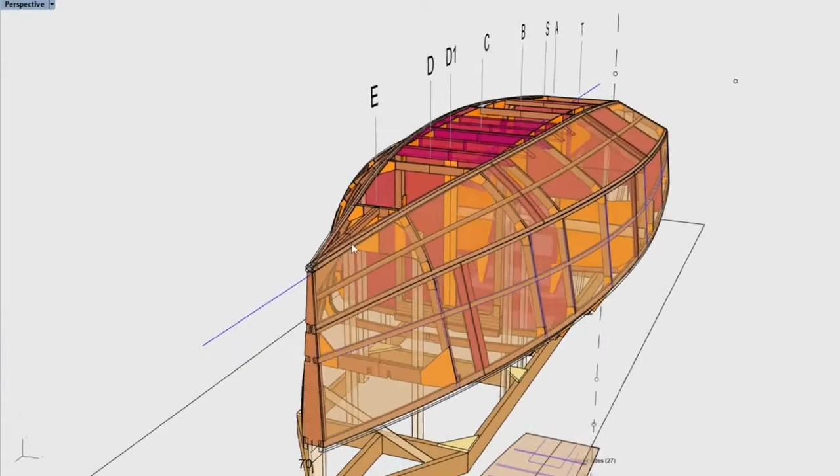The chine plank is left with extra material on the top and bottom edges for beveling. So there should be plenty of material for gluing that on, and then the forward and aft portion of the chine panel would go down next. Again, there will be extra material along the top edge of the chine plank that would then be beveled off flat for the bottom planking.

So finally, here we have the bottom plank. So that's the first layer of bottom planking. There's a butt block for the bottom planking here just aft of frame B, and also just ahead of frame D. That's the way it worked out in the sheets. Wanted to try to keep the joints out of the center portion of the boat, and I'll just jump down here and show you the second layer of bottom planking.

Here is the butt block for the first layer of bottom planking, right here and here. The second layer of bottom planking, which is on the outside, is joined here just forward of the slanted frame, and here right between the first 2 keel timbers. And of course you'll have the keel plate spanning across those timbers, so there'll be no issue there.

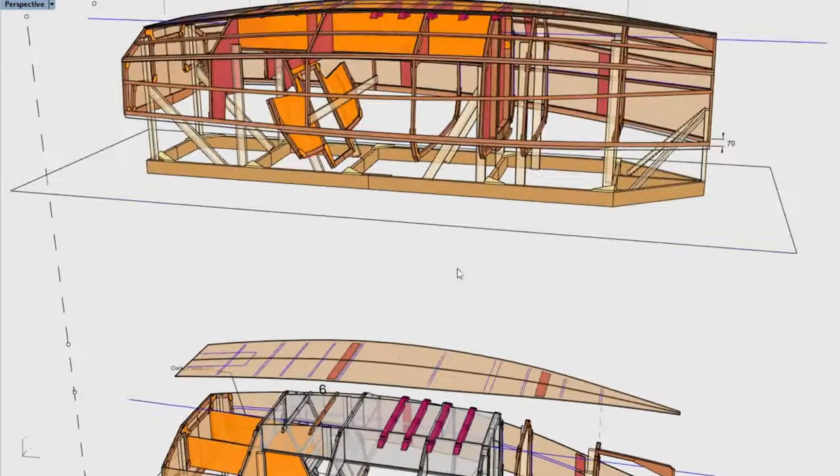So now we've got the hull planked, and you would finish off your bow round, and the stem cap would be installed after planking. Here is the stem cap. Of course, it's larger than the inner stem, so that it catches the outer face of the side planking.

This drawing shows all of the additional pieces that would be installed after planking and flipping, with the exception of the bunk side if you decided to install your keel timbers after the fact. So if your keel timbers are already installed, then this is what you got. So there is a forward and aft floor beam. So we have number 5 here and number 7 here.

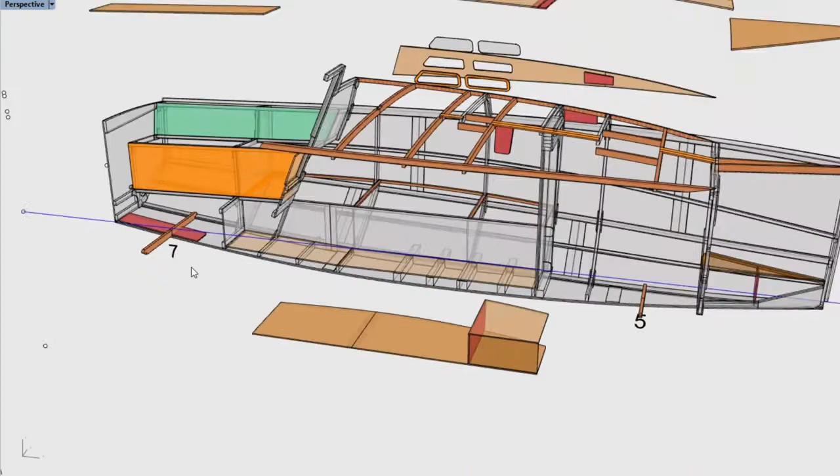We have a skeg doubler that goes above the skeg, and frame 7, or beam number 7, is dadoed out for that doubler. We have the doublers here on the inside of the hull for the chain plates. We have the bunk side, the cockpit side, which was being used, if you remember, to locate the slant frame and the transom, and that can be permanently installed after all these cockpit cleats are installed.

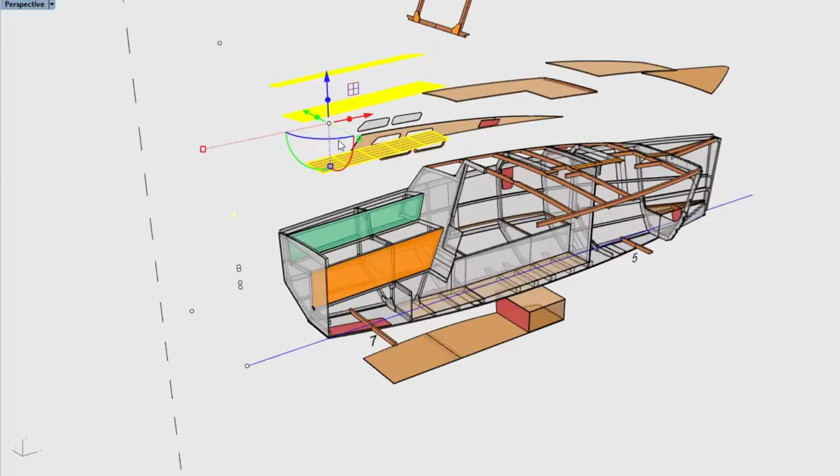And the cockpit side and the seat back are intended to be installed first, followed by the cockpit sole, seat top, and side deck. So I'll go ahead and move those down into position. Just the way the plywood overlaps, the order in which those are intended is the vertical panels first and then the horizontal panels like that.

Here we have the framing for the bunk tops, which would be installed now. So we have this outer cleat that's just piecemeal fitted between the frames B and C, and some cleats across the tops of those partial bulkheads, as well as a forward and aft cleat for the bunk top panel.

Here we have the cockpit sole, which is supplied in two pieces, a forward and aft piece. It's not notched out for this frame, and depending on what you want to do with it, I know some people are going to cut this up to create thwartships sleeping bunks, so builders can do as they please with that.

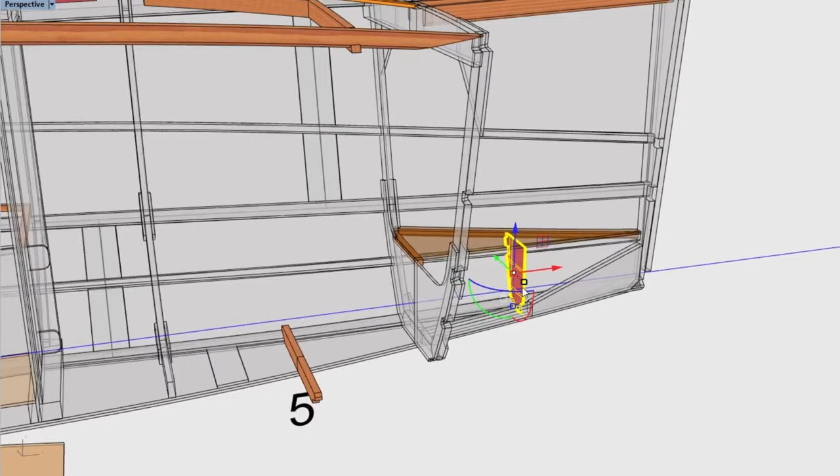We have this little partial bulkhead which can be installed after the boat is flipped, as well as the framing for the crash box, and of course the top for the crash box, which is maybe optional, but it could just be glassed over, but it's nice to have a solid top for that.

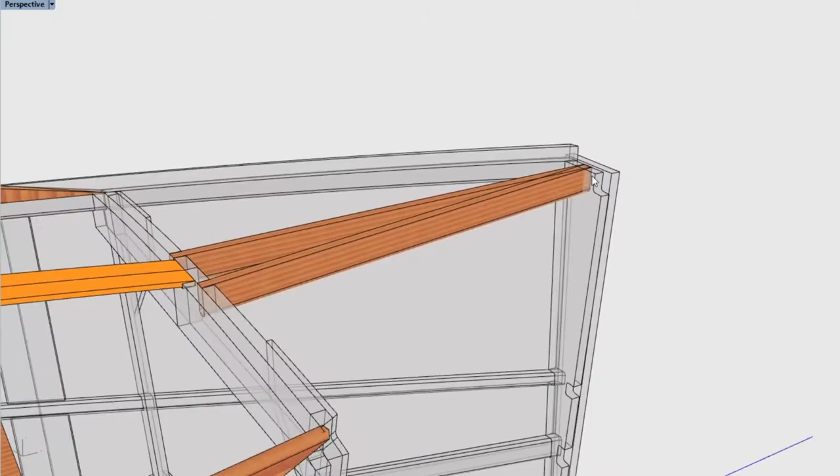Here we have the two king plank beams. These again are notched into the forward part of frame E, and they are also, I believe they're notched into, no they're not, I'm sorry, I believe they're not notched into the stem. Okay, well, that may be something we need to add, is a notch in the stem for those king plank beams. So there's the first little correction I found.

Okay, then we have the deck beams. There are 4 deck beams, as well as the stringer here along the top corner of the cabin that will support the sheer strake. So here we have the sheer strake. It's in 2 pieces with a butt block, and there's the butt block there just forward of frame D1. The sheer strake has, again, those plywood doublers for the port lights, and we can put this into position.

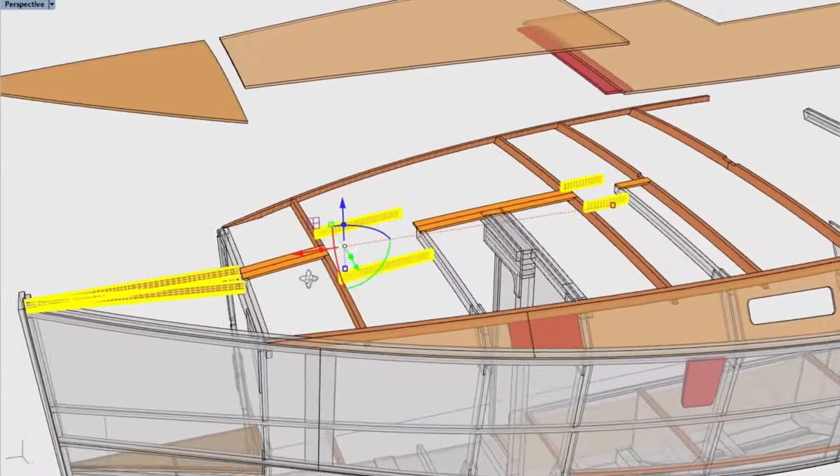And there's the sheer strake on. I won't bother with the port lights. We have a foredeck, of course, and we have a fore and an aft cabin top panel. Also, these fore and aft pieces here and here, and those are the fore and aft beams that are also included in the kit. The fore and aft butt block for the deck, these 3 pieces, is provided in the kit as one continuous piece of plywood which can be cut to fit.

And again, these hatchways are shown in the plans, and the cabin top is not cut out for those 2 openings, just to give builders the different options. So I'll go ahead and glue down now the aft portion of the cabin top, which you'll notice is already notched for the observation dome.

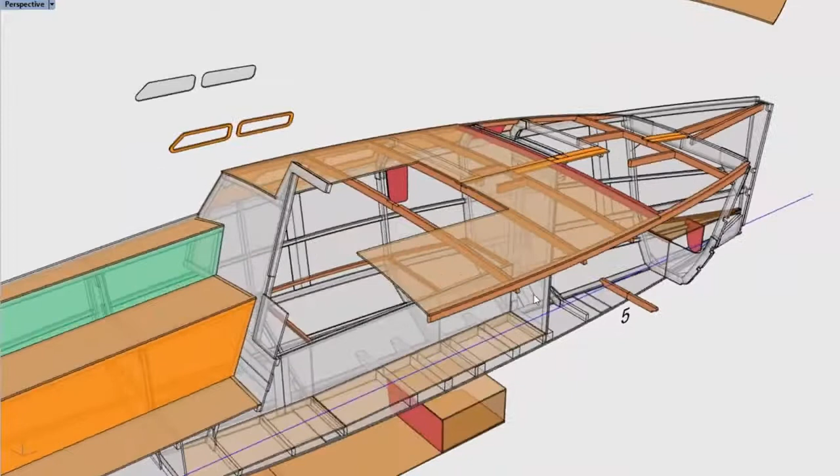And if you are not going to be installing the observation dome, or you're going to do something totally different, your kit supplier can give you an extra piece of plywood or omit this sheet, because these 2 pieces take up just about a full sheet of plywood. Here they are right here. So if you didn't want this cut out, you're going to need an additional sheet, because these are fairly large panels.

If you are going to do the observation dome, then you're ready to go. You'll first glue down these 2 cleat rails here, fore and aft, this one here, and that will support the sides of the dome, the front part of the dome, and then this dome floor, this orange piece here, would be installed if you were going to do the sliding hatch as designed. And then once the observation dome was installed, you could then cut away the center portion of this deck beam, as it wouldn't be needed.

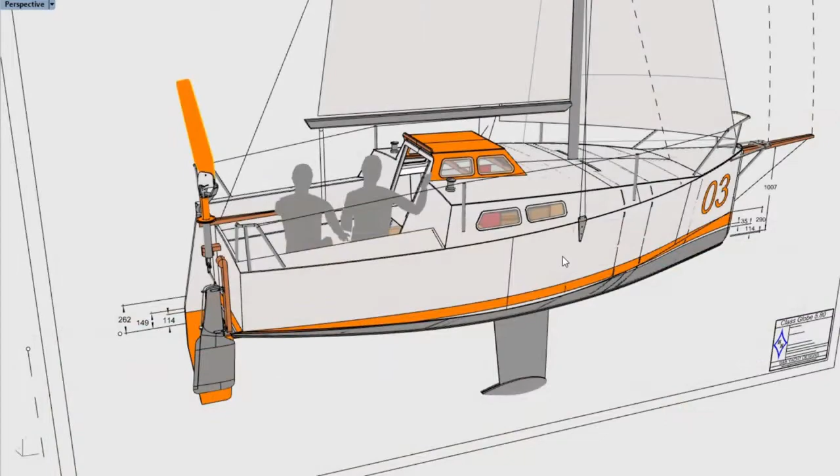Here's a finished rendered model, and we've taken the liberty of putting a waterline on the boat. I have dimensions for this particular waterline. If anyone is interested, that'll be with the kit plans themselves. Of course, we have our B&B wind vane drawn on there. I think guys have been looking at the various options, but I think this would be a good one.

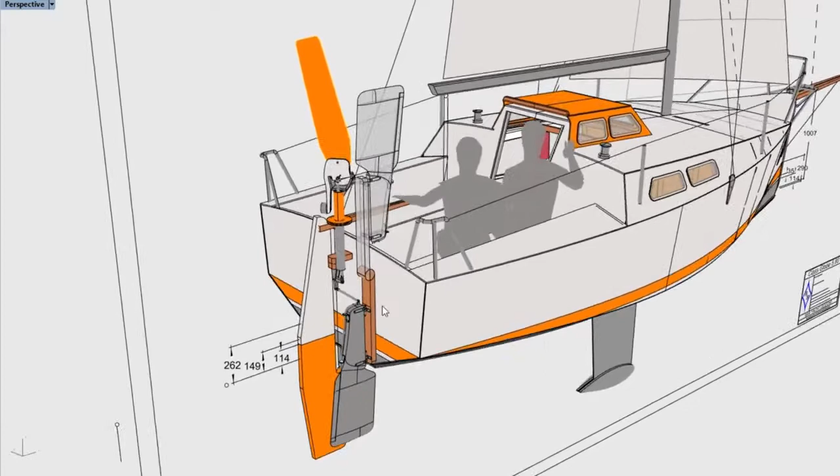These other parts, I think, are being worked on as we speak. The sails, the mast, the rigging, and possibly these pulpit hardware pieces. We've just rendered these quickly from the plans as provided, but it's nice to see the boat all painted. The shape looks really nice. I think it's a good looking boat.

So that's all I have for the tour of the 580 kit.